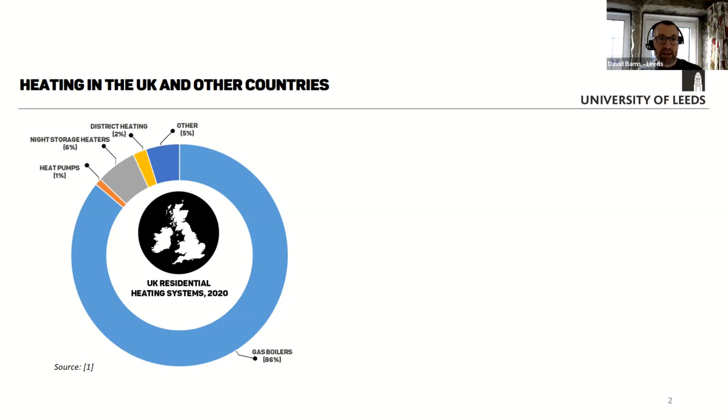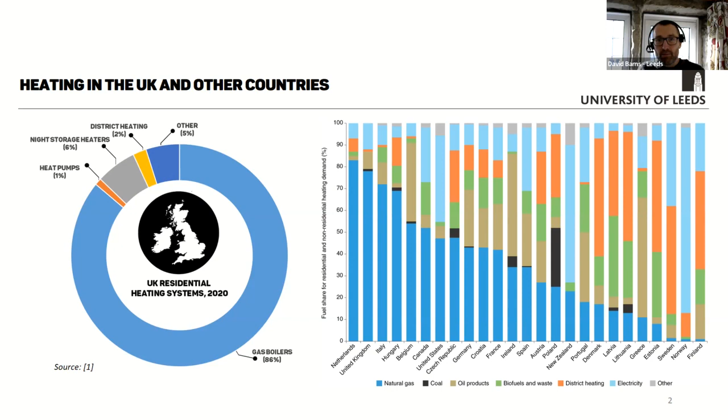So I'm going to start off with, I don't think I need to tell anyone this, but just as a way to frame this conversation, this is where we are in the UK in terms of our different heating systems. And you can see how incredibly reliant we still are on gas boilers. Other options, as I'll come to in this talk, are starting to make some headway, but you can see the scale of the challenge we've got. Heat pumps are only on 1%, district heating on 2%. Gas boilers, obviously, have the massive lion's share of the UK's heating systems, and you can see how poorly we fare in comparison to a range of other countries, with only the Netherlands being more reliant on gas than we are in the UK.

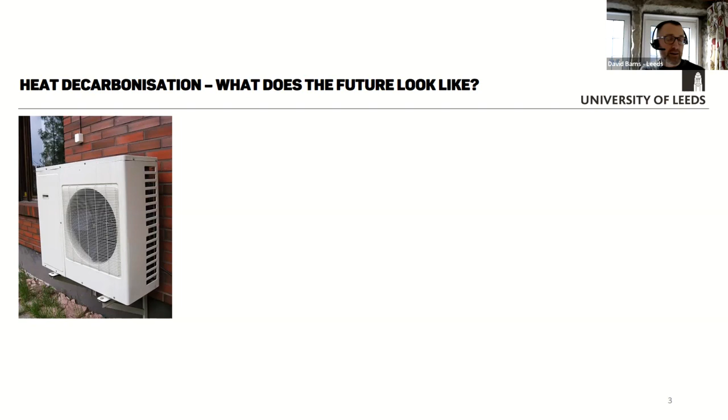When policymakers and people generally are thinking about how we're going to decarbonise heat, there's a few options that people go to. The main one that you will hear about in the news is heat pumps. Specifically, I'm going to start with air source heat pumps. The government has a target for installing 600,000 a year by 2028, and we're currently at tens of thousands, so we're way off that. This is essentially a single ground source heat pump system. There's two types of heat pumps we can use: ground and air, and I'm including water source within ground source. But essentially, you can see here that it's quite a lot of disruption. It needs some outside space. So this is part of the reason for looking at sharing systems, which I'll come on to.

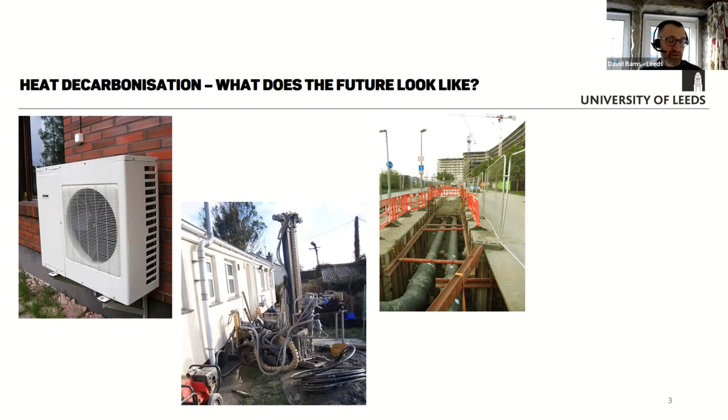Heat networks. Now, here's a picture of a heat network being installed, and you can see these whacking great pipes in the ground that will connect a single heat source, preferably a net zero compatible heat source like a heat pump. But in Leeds, for example, we've got a big energy from waste plant, and while no one, I hope, would support new energy from waste plant, the idea is that heat is going to go to waste unless it's used. So in Leeds, they're pumping that heat around the city, and it's serving many thousands of properties, mostly social housing and lots of civic buildings, with plans to expand it hugely.

And then the question mark at the end is hydrogen boilers, and there's a whole challenging situation around those who believe that hydrogen is the future and those who believe that hydrogen has no place in heating. And I'm happy to talk more about that if anyone has specific questions they want to ask about that.

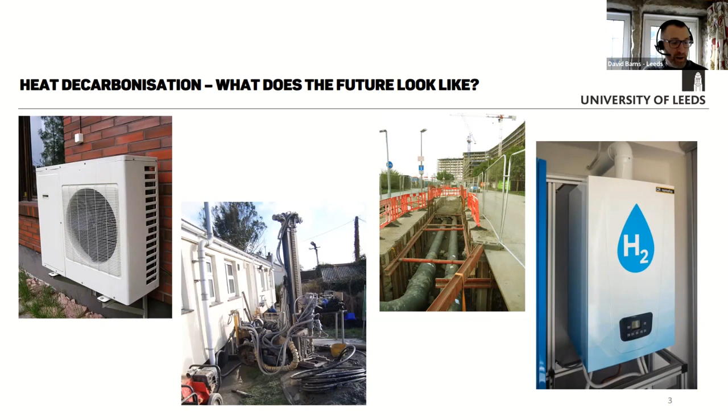But I've included some of that kind of narrative in my research. So what we hope the future looks like is these happy people. Yeah, these are all heat pumps, air source heat pumps here. These happy people standing by their heat pumps.

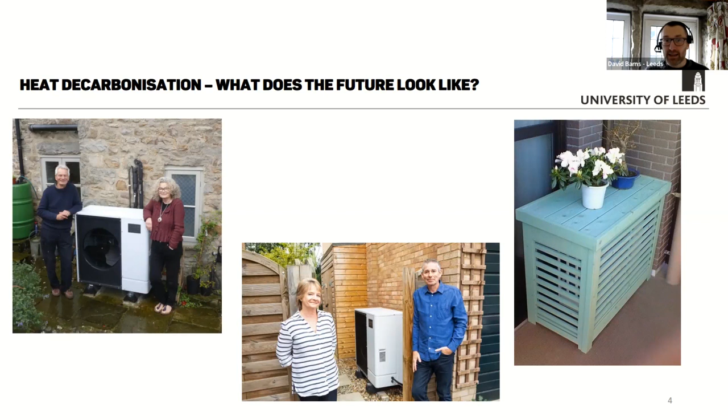But what you can see is these heat pumps do take up quite a lot of space. You need a property that can actually accommodate it. Okay, and not everyone has that. And not everyone lives in heat networks. They're probably going to grow outwards from urban centres because you need the density normally to make them work because of those high temperatures, those big pipes. You need a density of properties, preferably of different types, within an area.

And these pictures here, I put a more kind of semi-urban, or maybe on the edge of a city, moving into more kind of residential areas where there isn't necessarily the scale and density of heat demand. So what's the solution in those situations? So this is where the research that I did during my PhD and then carried on after that looked at shared ground heat exchange. And that follows on quite well from the talk we've just had.

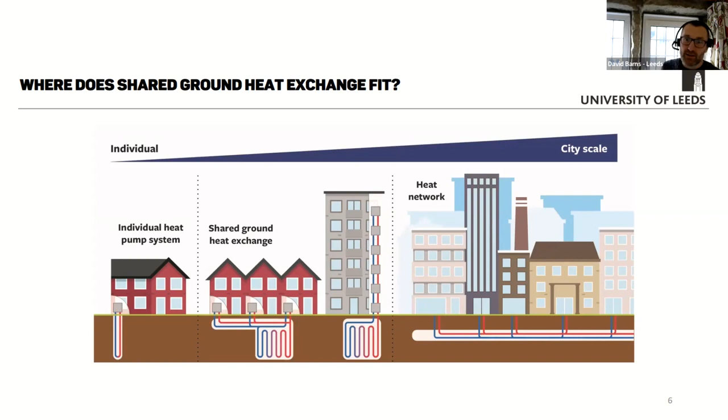And essentially, this is a type of system where you have a ground loop. It's also called a shared ground loop, an ambient heat network, 5th generation district heating and cooling, street by street district heat network. There's so many different names for it, and that's part of the problem, is that it's not clearly defined. But essentially, as you see in the bottom image, some kind of ground array, a number of boreholes.

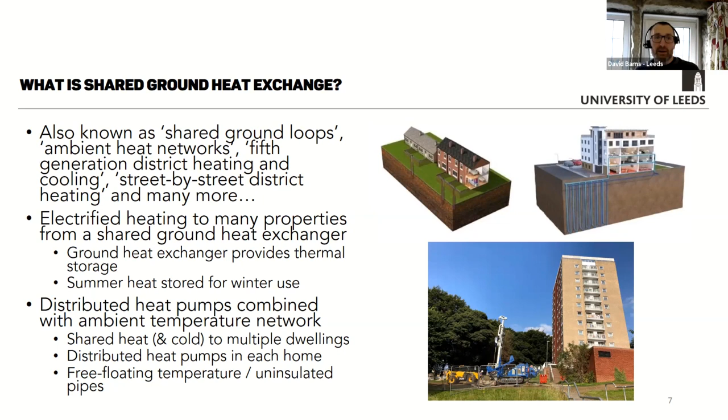They can be any type of boreholes, but normally the ones being installed at the moment are closed loop. But you can use aquifers, whatever heat source you've got available, essentially, connected together through an ambient, very low temperature heat network to a number of properties with distributed heat pumps, as we heard about in the previous talk. So there's a few defining characteristics of that technology, but I think we've heard enough to understand what that is.

So this research that I'm going to mainly be focusing on was post my PhD, but using the findings of the PhD to inform and support this policy engagement process where we brought stakeholders together and explored the technology, what the issues are, why it's not happening at a greater scale. And part of this work, we did this rapid evidence assessment, and we looked at the various different benefits and challenges that these systems might be able to offer.

And one of the key things is, if you're a household, like I am here, like my terraced house in West Yorkshire, it's time to renew my boiler. And this is a decision households are facing every day. And what do you do? At the moment, I don't really have a choice. Like that image you saw, I don't have anywhere I could install an air source heat pump. And there's no heat network here. And there's not going to be a heat network in this kind of semi-rural area. And so my options are really limited.

So an ideal way of approaching this that we found in the research was, if a company, an organization, an entity was able to come and put the pipework in the street, and it just sits there. It sits there waiting for households to make the decision that it's time for them to connect. Then that creates a whole different dynamic: rather than being compelled to, it gives you the option of saying, oh, right, okay, so it's time to replace my boiler. There's this other option now because they came and installed those pipes recently.

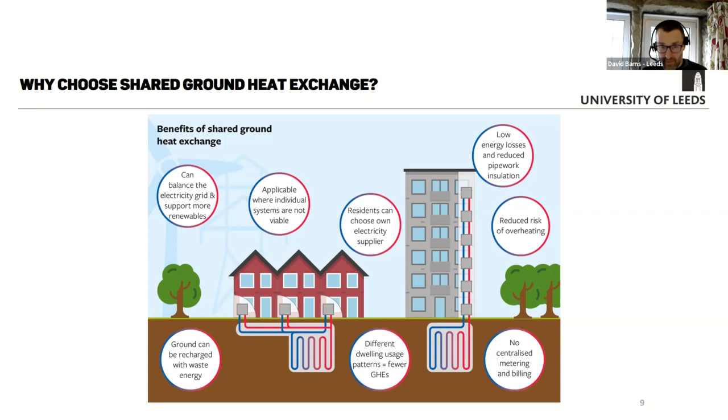Now, that's, of course, an idealized scenario, and there's specific challenges around actually making that happen. But that, to me, is one way that we can start to see real penetration of these types of systems. But of course, it comes with huge challenges. One of the key things is that the market is very small at the moment, and it's concentrated with a very small number of firms involved in this.

Of course, we need that to grow. We need competition. We need different types of approaches. We need better, higher efficiency systems. But at the moment, it's very concentrated.

And that image on the right shows how, for the government, these systems really fall between two stools, because they're not really heat networks, they're not really heat pumps. Well, they're both, and neither in a way. And BEIS themselves admit that they have a heat pumps team and they have a heat networks team, and these kind of fall between those two. So they've kind of missed out on a bit of the coordinated support that the government's put into other technologies.

Thinking about that utility model that I mentioned, like this broadband model where a company comes along and puts the pipe work in and puts the broadband network in. You've got to make that investable. And that's a real challenge. If you can't compel people to connect to your system, then how do you get your returns? And that's a big challenge. So there may be a role for local coordination on a street by street basis for local authorities or other entities. So these are just things that we explored in our work.

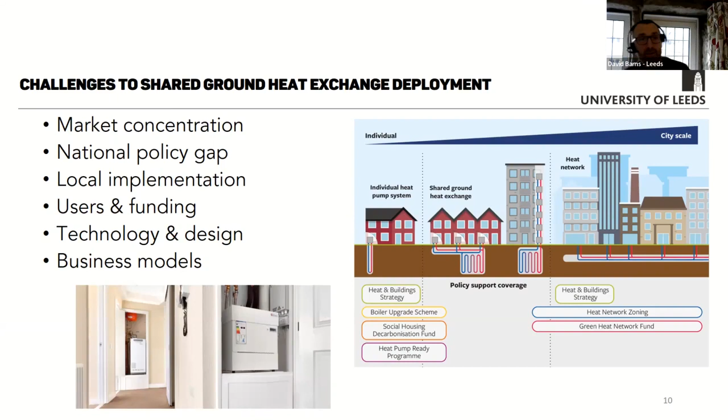This was based on research during my PhD that was looking at, in new development specifically, why in some cases new development's going to happen and you end up with gas boilers, and in others you end up with shared ground heat exchange. Of course, new developments are only part of the challenge, but we're going to have 8 million homes in the UK before 2050. So it is an ideal way to approach this, because if we can tackle new homes, then it does lead into retrofit scenarios in terms of technology getting better, experience and installers, everything ramping up.

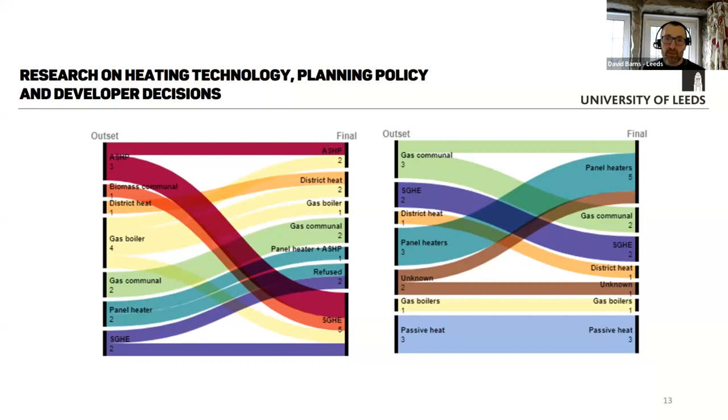So I looked at 30 housing developments, traced them over the course of their planning journey from the start. What type of technology was going to be used, what interaction did they have with the local planning authority, with different planning policies, how they interpreted them, traced that all through, and then looked at what happened in the end. Here is an image to show the different types of systems that I included and how they changed through the planning process and how they ended up. And essentially, there's a few key aspects, which I'll come to over the next few slides. I'm rattling through these at quite a fair pace, so hopefully this will prompt some ideas, thoughts and questions that people can raise afterwards.

But what I found is that you can drive local change with the right policies in place and with the right approach to supporting developers and enforcing the policies when it mattered. And one key aspect is that developers, essentially, want to do the lowest cost, lowest hassle thing. And I'll say a bit about why that is in one of the slides.

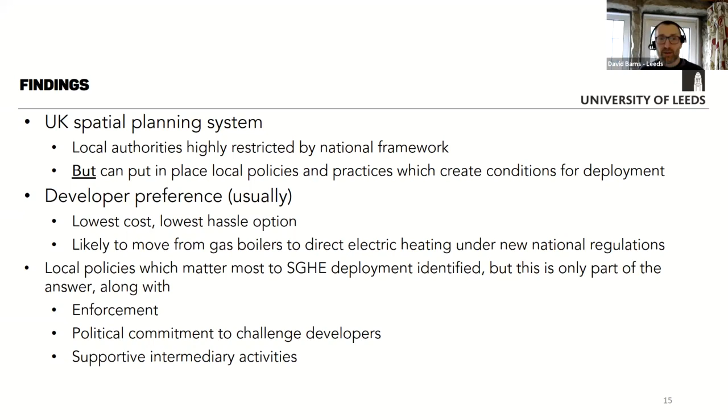But what I found was happening is that gas boilers have been the go-to technology that developers have been using around the UK, and that's actually moving to direct electric heating. And it's happening under the radar because no one's really planning for that. It's not in any of the policy documents. No one's planning for a future where we're all using direct electric heating, but it's happening right now because of these external factors and social and political factors, which I'll briefly touch on. So unless the right policies and the right approach to enforcement are put in place, that's probably what we're going to see happen in the UK.

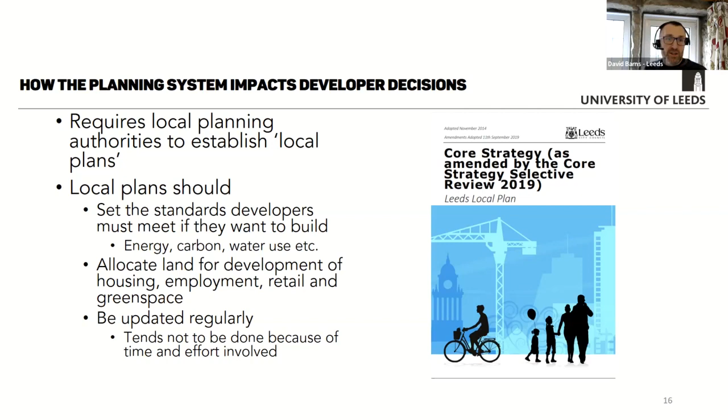So local plans. Local plans are how local authorities develop and implement their planning policies. And they are supposed to update them every 5 years, but it's a hugely time and resource intensive process, so it tends not to happen as often as it should.

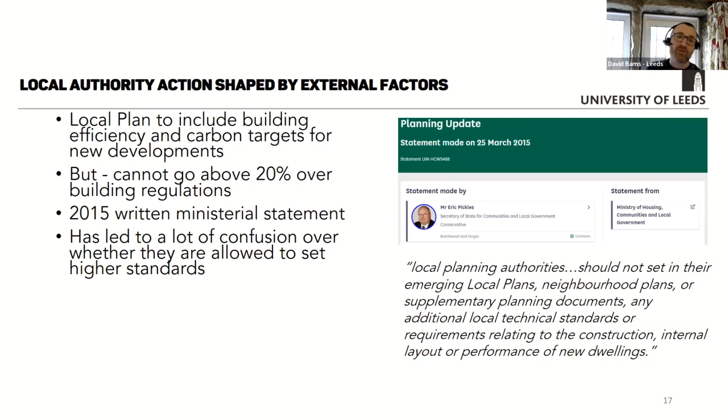There's a whole host of these external factors. National government have kind of muddied the water over the years, saying that they can only enforce 20% carbon reductions. Oh no, they can enforce more than that. And then the planning inspector doesn't know what to do, and they challenge it when local authorities try and take kind of more bold steps.

And that means essentially that there's a constant pressure for planning authorities to get things built because they need to pass these tests, as well as all the other reasons that it's important that we have new homes. But this is a part of the challenge why local authorities are reluctant to implement higher standards, because it challenges them meeting this target, basically.

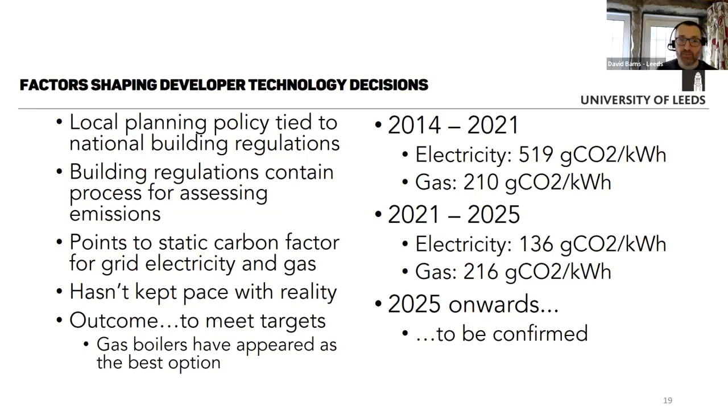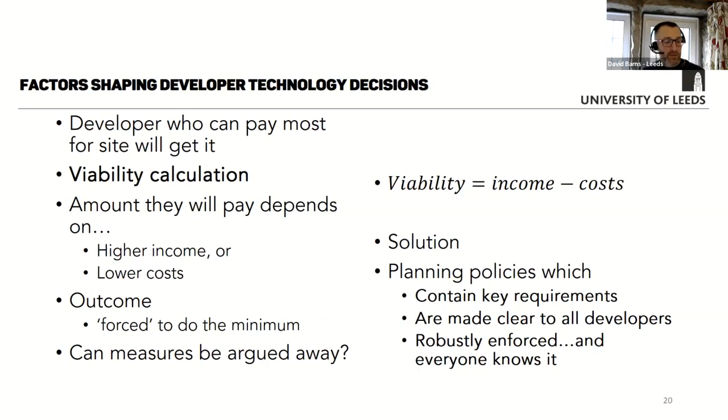Leeds City Council are updating their planning policies to try and address their climate emergency commitments, as lots and lots of local authorities are doing. And through engaging them with this work, I have actually done a specific piece of work to try and implement these aspects into the new local plan, which has just finished its second stage of consultation.

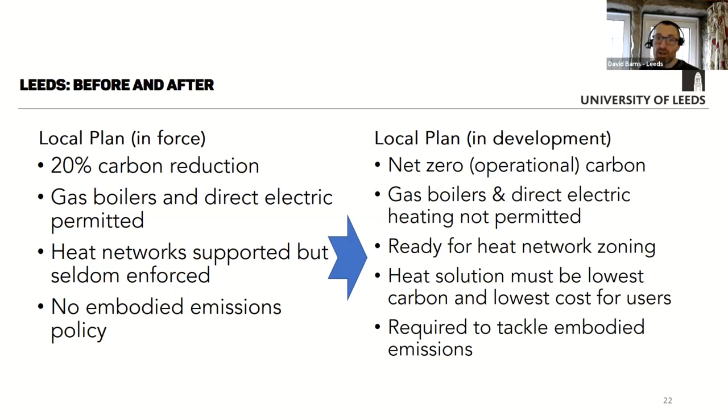So that was the old situation. 20% carbon reduction was the maximum they can do. Gas boilers and direct electric heating were permitted, and that's what we were seeing. And these new policies are now based on this research and the work I've specifically done for them to support their local plan. These are the new policies they put in place. They've banned gas boilers, they've banned direct electric heating, or will have when they come into force. They're preparing for heat network zoning, which I can talk about if anyone is interested.

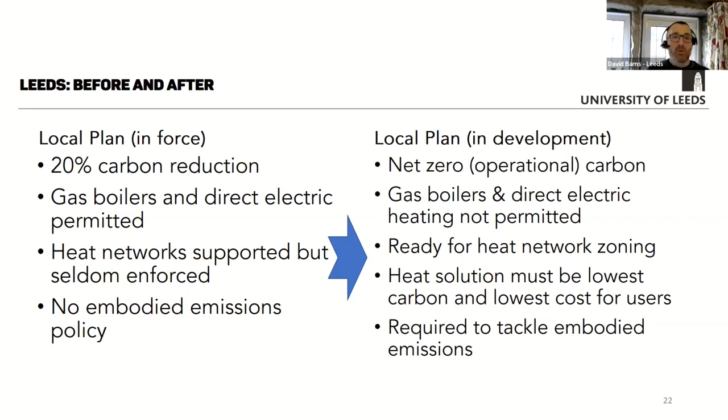They've put in a requirement that the solution must be the lowest cost and lowest carbon for users. So they actually make developers calculate these things and demonstrate that what they're choosing is actually going to be the best for the people who are actually going to live in these properties.

The final bit of work I'm going to show you is just about these costs, because when we presented this work and engaged with government and policymakers, we constantly got asked, well, how much do they cost? We kept hearing that surely it's better to build a heat network where you can share everything than build these kind of singular, smaller systems where everyone has their own heat pump, because surely that's not the best option in terms of the capital cost.

One key thing that came out of it is it's really hard to compare these different systems, because there is no comparing apples with apples. When you've got an air source heat pump, for example, you've got the air source heat pump on its own, and normally the radiators and pipework inside. Whereas in a heat network situation, you might already have all the internal work, but you might be connecting it to an external heat network that's been built. So that's a different scenario.

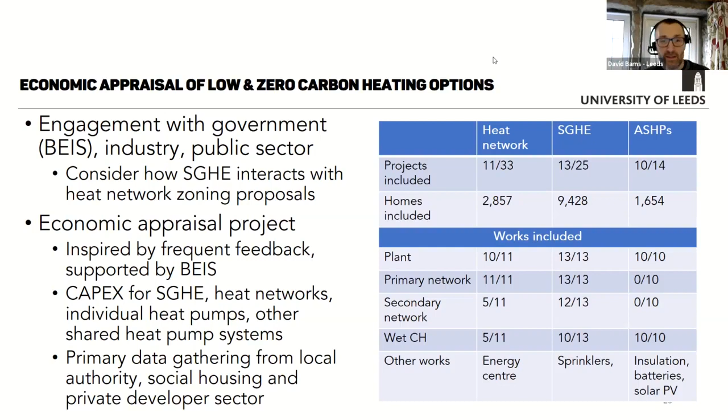You can see here that there's a few key things. The prices give you an idea that the costs of actually delivering these systems are pretty high, especially compared to just replacing a gas boiler with another gas boiler. The bottom row shows that there were frequently lots of other works done at the same time. Often, for example, when local authorities were installing shared ground heat exchange, they were also upgrading sprinkler systems, and all those costs are wrapped in together. So it's really tricky to isolate different elements of cost.

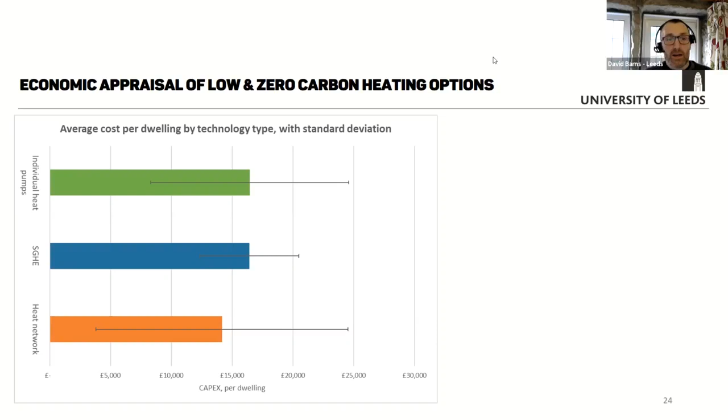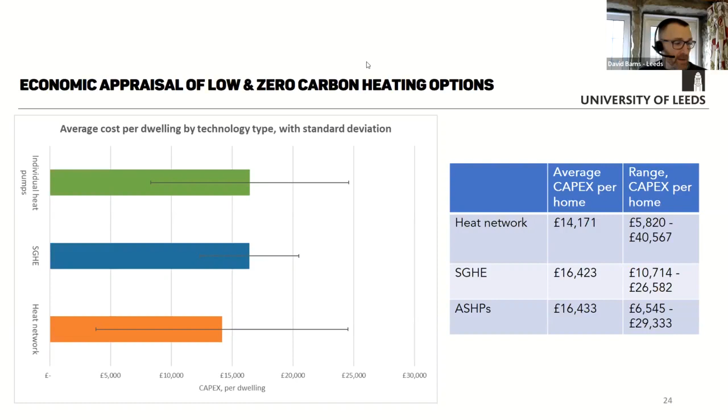So we're still refining and revising that. We're going to take it back to BEIS in a few weeks and explore it further with them, and then we're going to write up and publish later this year.